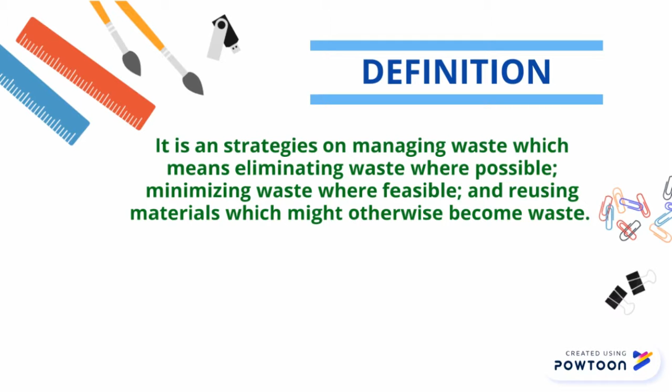Innovation in construction site waste management is a strategy on managing waste, which means eliminating waste where possible, minimizing waste where feasible, and reusing material which might otherwise become waste. Efficient waste management will propel Malaysia's infrastructure to be more resilient and sustainable.

The main agenda from the government towards sustainable construction site waste management: firstly, at least 7 states should establish regulations on solid waste management and public cleansing for construction solid waste schemes and licensing for construction solid waste in 2020.

Second, 20% annual increment in construction and demolition waste recycled. At least one awareness seminar on construction waste conducted. Status report on the construction and demolition waste recycle published, and study on achievement of construction and demolition waste recycle published.

Lastly, establishing at least 3 new or existing public or private C&D recycling centres equipped with construction-specific equipment in key locations, 1 landfill equipped with C&D waste recycling facilities, and report on utilisation of C&D waste recycling centre published.

Did you know that the UK construction industry creates about 100 million tonnes of waste each year? If we put all that in a pile, it would be taller than the Shard, the highest building in Europe. That makes it the UK's biggest contributor to waste generation and dwarfs the amount of household waste.

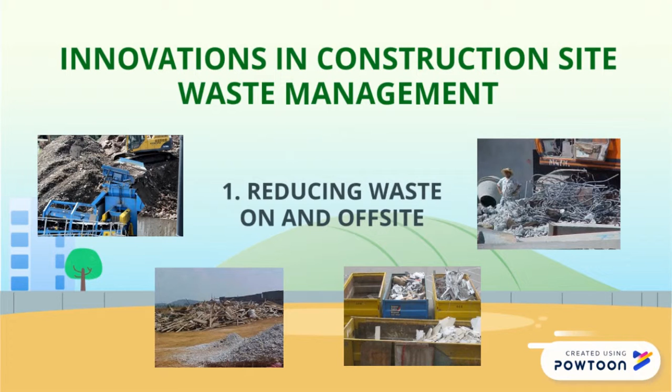Innovations in construction site waste management. The first one is in reducing waste on and off-site. Inefficient site management is the major cause of waste management problems.

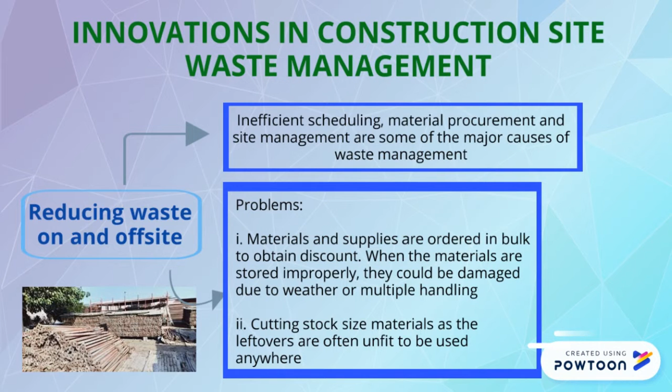The problems are when the materials are stored improperly, they could be damaged due to weather or multiple handling. Cutting stock size materials means the leftovers are often unfit to be used anywhere.

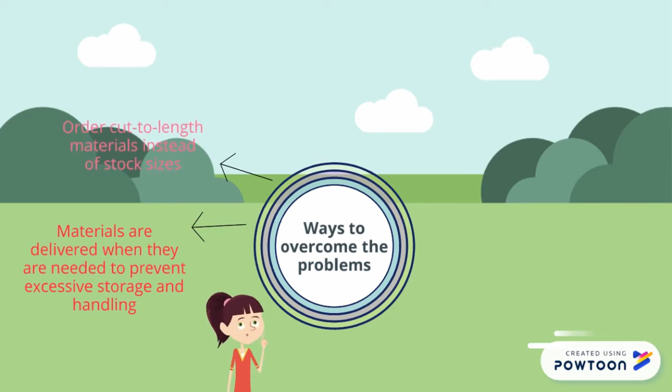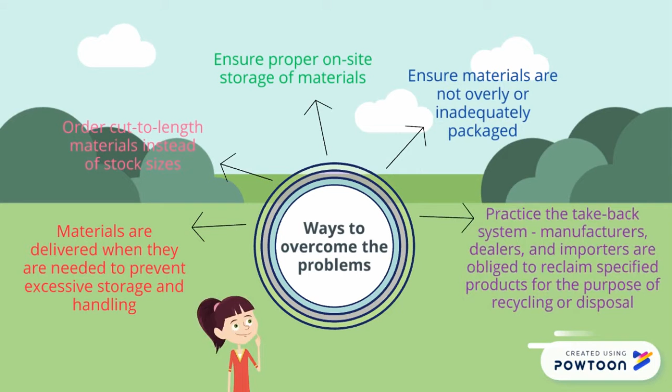The ways to overcome the problems: materials are delivered when they are needed, order cut-to-length materials instead of stock size, ensure proper on-site storage, ensure materials are not overly or inadequately packaged, and practice the take-back system with manufacturers, dealers and importers.

The second innovation in construction site waste management is recycling construction waste materials. Example 1: recycle glass facade. This process can be combined with concrete and create a beautiful facade resistant to erosion and corrosion.

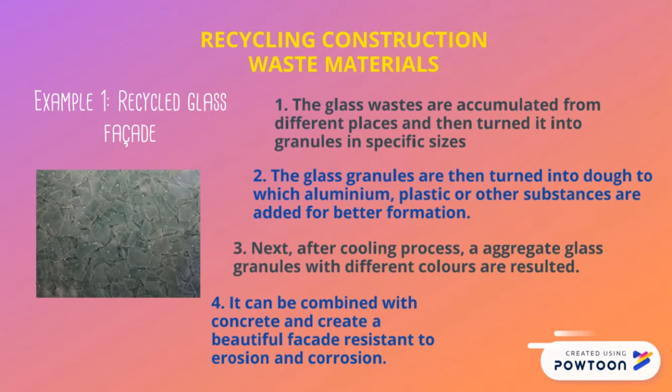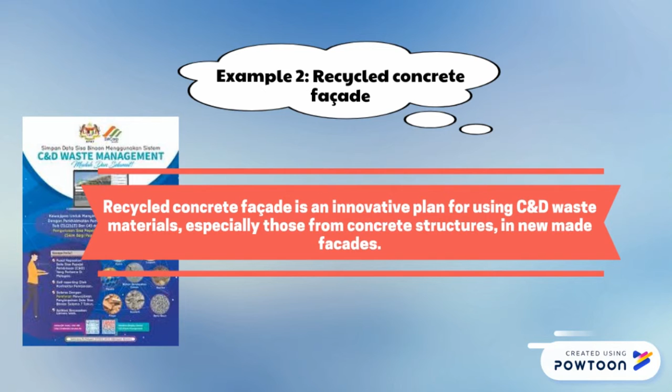Example 2 is recycle concrete facade. This is an innovative plan for using C&D waste materials, especially those from concrete structures, in new made facades. Example 3: recycle of waste wood.

The process is: waste wood is shredded and separated from foreign elements such as metal. The resulting wood chips are then sent to construction and demolition waste recycling facilities to be recycled, and they can also be used to generate energy.

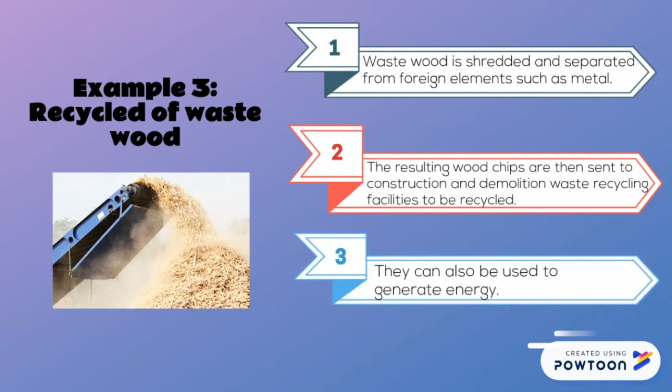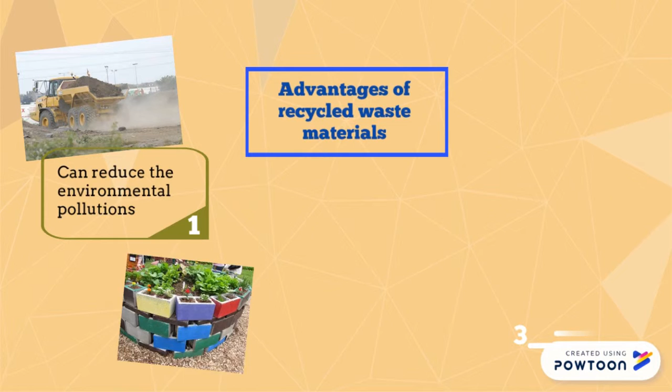The advantages of recycled waste materials: first, it can reduce environmental pollution. It can be used in many things such as landscaping, park designing and slope leveling. It can reduce the emission of greenhouse effect.

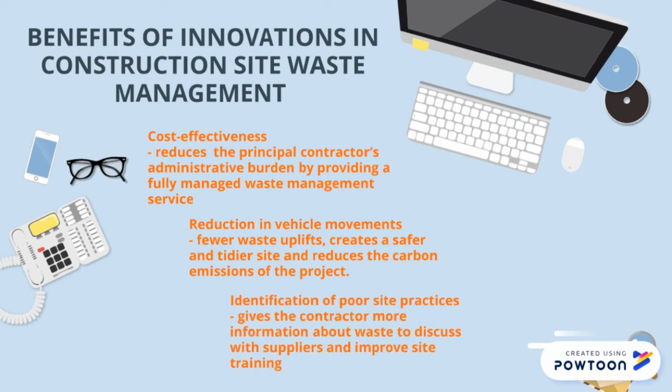The benefits of innovations in construction site waste management: the first one is cost effectiveness, the second is reduction in vehicle movement, and the last one is identification of poor site practices.

The critical and analytical review: sustainable waste management doesn't stop at disposal. There are a few ways to prevent future waste.

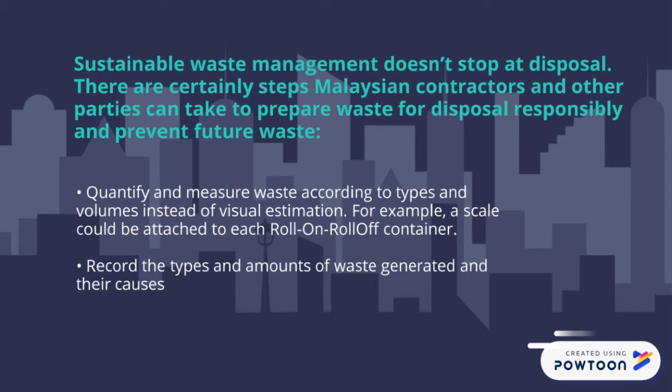First is quantify and measure waste according to type and volume instead of visual estimations. Next is record the type and amount of waste generated and their causes. Increase the number of transfer stations to reduce the cost of transportation. Then increase the tipping fee at landfills.

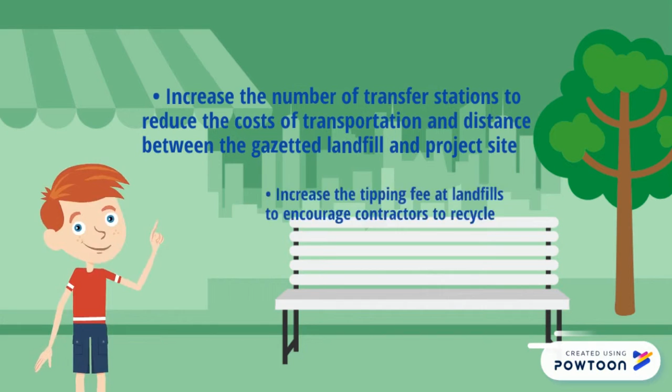In conclusion, proper waste disposal of green construction is important, with the Sustainable Construction Excellence Centre and the Construction Industry Development Board Malaysia.